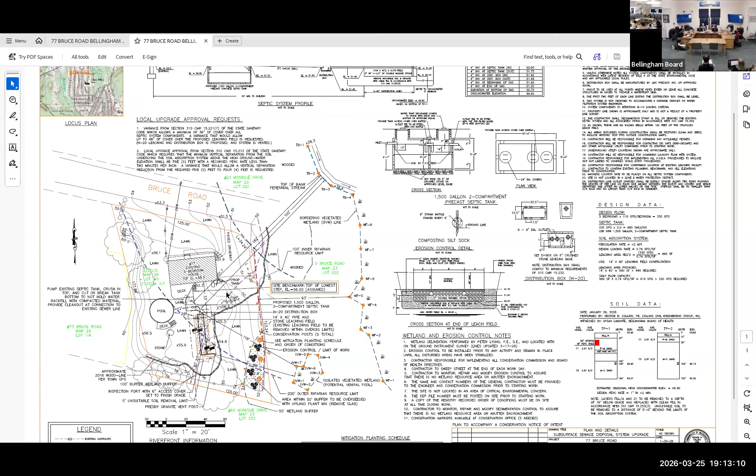The applicant has also requested a continuation to April 8th because everybody else is. So they're following suit, I guess. They all did this without knowing everybody else was doing it, I guess.

I wanted to free up some time since we have a lengthy agenda. All right, so I will accept the motion. Did they give a reason why that one was continued? They had to reflag and stuff, there was a flagging issue, some fault. Okay, I was looking to see if anything else came in.

I know Nicole wants to make this motion, but she hasn't yet had the opportunity. I did the first one already, it's been so long ago, we've done that so many times. Okay, so I'll make a motion. All right, the motion is made, second anybody? Oh, second, thank you, Hannah. All right, any other discussion?

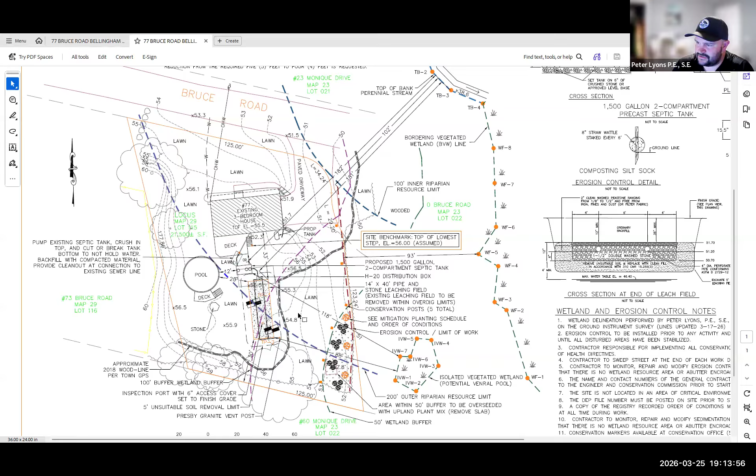All in favor? Aye. Okay, it's almost unanimous, brief departure from James just for the record, and we'll be continuing on, but that's it. Unanimous without hands. Also, just for the record, Steve's caller is not here this evening, so he is not going to be present for any of those votes.

We have a continued hearing for notice of intent for 77 Bruce Road, upgrade of a septic system, and after-the-fact removal of trees and yard expansion within the riverfront area and buffer zone. George Perkins at 77 Bruce Road is the applicant, and the representative is George Collins of Collins Civil Engineering Group.

Good evening, everybody. Can you hear me and see me? Yes, how are we doing? My name is Peter Lyons, I'm an engineer and soil evaluator with Collins Civil Engineering Group. Here tonight representing the homeowner, a notice of intent for a failed residential septic system, and after-the-fact notice of some tree removal within the 50-foot BVW limits and riverfront areas.

I presented this at the previous meeting to the commission, so I'll start with a recap and then jump into the changes made. Let me try to share the plan if someone can allow that. Looks like... okay, confirm we're looking at it. Yeah.

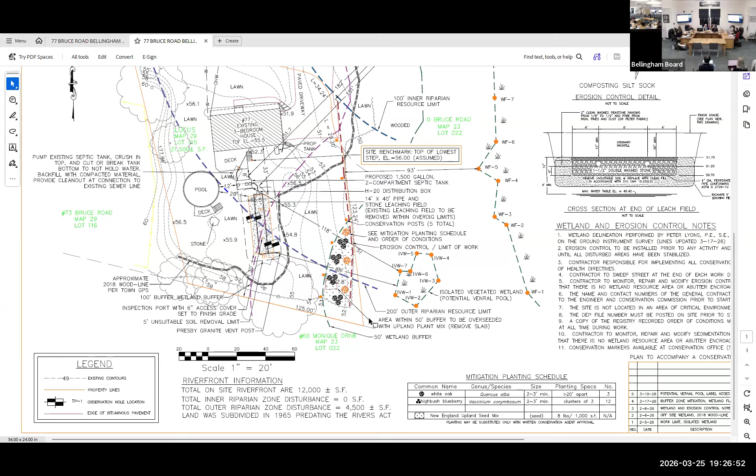So there's plenty of groundwater separation. And again, just to reiterate, we're fixing the failed septic. So anytime there's a failed septic system within the buffer zones, replacing it with something modern and up to par is a good thing.

Oh yeah, we are in consistent consensus with that—it's just more the level of restoration that the commission feels is desirable, warranted. And we have that isolated vegetated wetland, a potential vernal pool. That looks, just by scale, it looks like it's within almost 50 feet of where they want to restore.

So Pam, James, Moran, Nicole, what do you think? Do you want to expand and have them do more in the lawn, the 2018 lawn area to the east—west, I guess it is—of the area that they're proposing? And if so, about how much?

I mean, I kind of think we have to require that it meets the riverfront standards at a bare minimum. Yeah, it just seems like there's so very little vegetation for how much area. Hannah, what would the riverfront requirements be again?

You, I think, noted on the plan. Yeah, so it's typically up to 5,000 square feet. When you have a property that's a lot older and they've maintained clearing there prior, that's kind of essentially grandfathered in, but going over what's currently there.

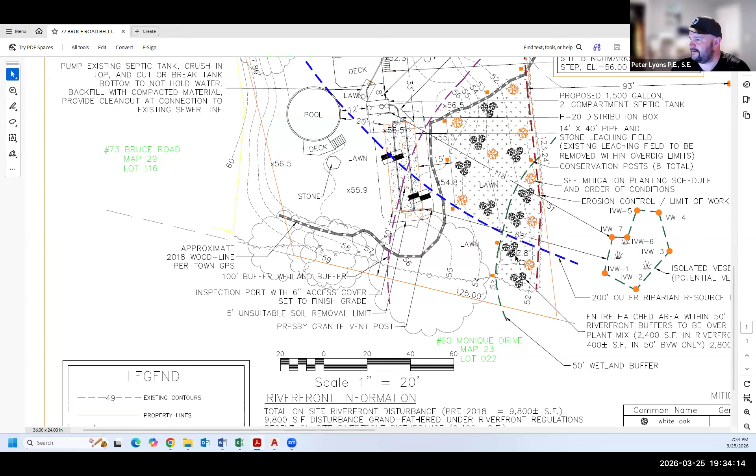Yes, the clethra, what else? Sweet pepper bush, yeah. And then there's Itea virginica, the sweet spire, I think it's called - I forget the common names. That's another good one for retention and understory. Maybe just look into a couple more options to diversify it a little bit.

The blueberries, I'm not feeling super confident about that many blueberries. How are you feeling about the number of oaks, the red circles, the proposed white oaks? Is that the right quantity?

I think now that you're pushing the quantities closer to each other, would there be an issue taking one or two of those out and doing more shrubs instead? Yeah, I mean, I think the number's fine because in the woods trees grow next to each other and they compete interspecifically, but I don't see that being a crazy number. Would there be another tree species you would suggest to replace in a plan like that size?

I was going to think black tupelo, but I don't think it's close enough to the water. That's something that if you guys want to issue an order tonight for the work, we can also just request as a condition that they come back with an updated plan. Yeah, that's a good idea. I just want to give him some ideas, so this gives us a chance, and he's not like, what the heck, where do I go from here?

I'm a big fan of white oaks, but diversifying it a little bit, maybe the tree species as well. Red oaks, you can throw some red oaks or black oaks in there too. Those are more prevalent than white oaks. I do like to see white oaks because there aren't too many of those there. So you'd like them to branch out into a little diversity. Yeah, that would make sense as a start.

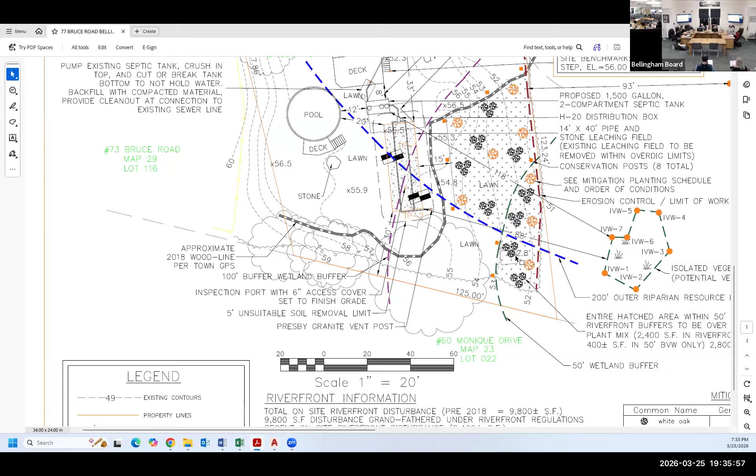Peter? Yeah, no, I understand everything the commission and members are concerned with, and we're fine with making those changes. I guess my last comment would be if there's any way to issue a conditional approval somehow, because this is a failed septic and time is of the essence. We've already continued once, and the homeowner is basically minimizing their water flow before it backs up into the house. So we definitely want to get this moving as soon as possible. We have no issues working in cooperation with the commission to get it done as you guys see fit.

I think you're done with it. No, I mean this is a great time, it's defrosted, so. It's defrosted out, for now. Okay.

With this plan, would your recommendation still be the order of conditions and then a separate enforcement order? I mean, that's what I always recommend, but if you guys want to put them together, we can. The enforcement order would cover the restoration.

So just issue the order essentially allowing the clearing up to those buffer markers that are on there, and then issue an enforcement order for the restoration, so they're not tied together. Then they can do all the work they want on that, and if you want to see a little bit more for the restoration plan, that would be part of the enforcement order, right?

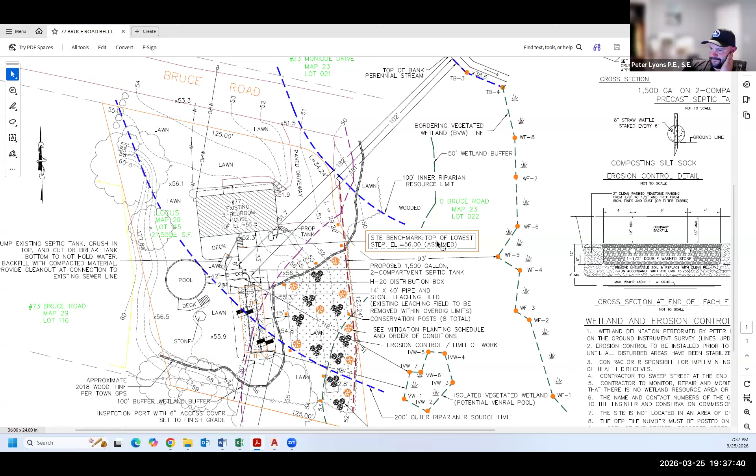Time-wise, instead of tying it to the order where they have three years, we can say okay, by next spring have stuff in, and just be able to monitor it a little bit easier. That's just what DEP recommends, so.

Yeah, I mean, I think we should definitely get them some approval to get the septic done. Yeah, that would stress me out too, if I was a homeowner.

If we are following the suggestion of doing order of conditions first and then enforcement order second, and if that's the feeling of the commission, someone wants to make a motion to issue an order of conditions. So moved. I'll make it. Let's make sure we phrase it properly, I was waiting for you. Hannah is on board with how we're phrasing it because she's the one taking the notes about it.

Be as explicit as you care to, Mr. Motion Maker, and watch Hannah's reaction to see if she's not following you. Want to make sure the order of conditions statement he's making in the motion is clear enough.

I mean, I think if you guys want to just talk about the general conditions and then make a motion after that, that might be easier. So I assume just allowing for the order would essentially allow for the after-the-fact clearing up to the limit of the buffer markers that are shown. Correct, and then those buffer markers also need to be a condition of the order of conditions, but they need to stay in there, not just be part of the enforcement order.

The top of the slope is about the top of the property line, going down into the wetlands area. It's a fairly steep drop off, so we need to make sure that any necessary erosion controls are put in place and inspected by the administrator as part of the start of the project, so we don't have runoff if they get a big spring rain, especially since they want to jump right into this.

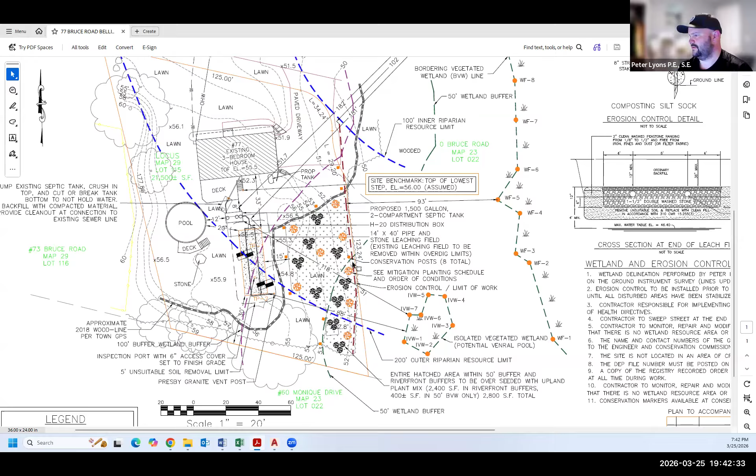Monitoring for the years, with the 75% planting plan, come back to us with an acceptable planting plan, because that was going to be part of the enforcement order, so we would review the number of trees and so forth. Something about that has to be done as part of the enforcement order prior to being released, and the monitoring is all that follows after that.

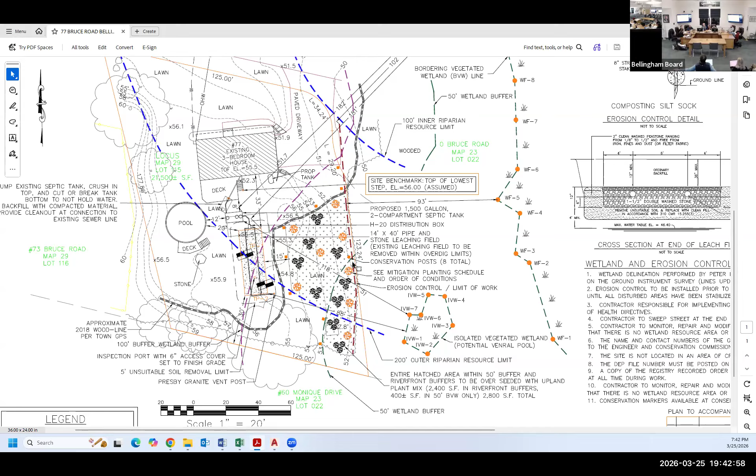Okay, is anybody else on the commission have anything they feel that Hannah might not already telepathically know from you and want to add verbally? Okay, so we have enough information for her to draft something up, but we still need to vote.

Yeah, we had a motion and a second, I'm just going to make sure nobody else wants to discuss points. All in favor? Aye. Opposed?

Okay, so we are signing off on an enforcement order, which Hannah will provide electronically, so we can just get that out.

I don't even remember, honestly. The new electronic signature thing we use—everybody's been able to do that okay online, right? Yep, nobody's had problems.

Good. So it looks like here we have an order of conditions in process, which will be drafted up as an enforcement order to make sure the restoration gets done and set up a timetable. It gives you a chance to respond, because the enforcement order would state that you need to come back with a slightly modified, now expanded plan, taking into account comments made by our arborist landscape designer, Nicole. That all good?

Yeah, that sounds like a plan. So basically, from my end, I'm going to make those revisions—we'll diversify the planting schedule, update the plan. That's basically going to be resubmitted as soon as tomorrow to the Conservation Commission, and that will act as the document pertaining to the enforcement order, but it will also be the same document applied to the septic contractor. It's probably going to be the same one doing the work, so we just want the approved septic plans to contain all of the required mitigation.

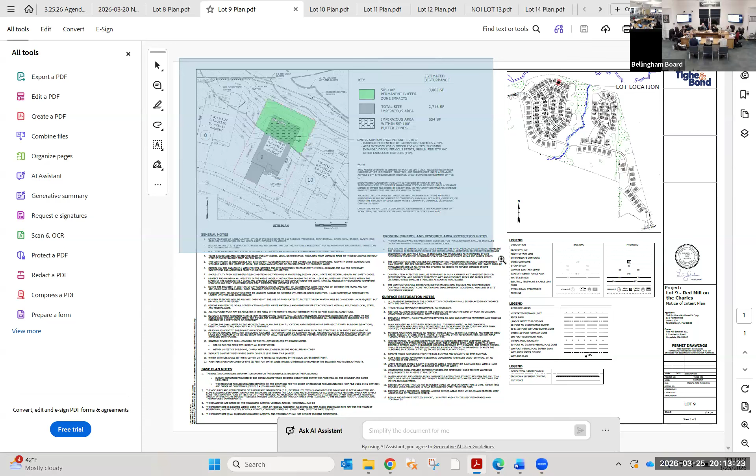You'll notice we have all the erosion control barriers shown on all the plans. Those are from the full plan set, and almost in all instances here, for the most part, they extend off the lot line. So you can envision between that lot line and that erosion control barrier, that's going to be restored, replanted, and left with natural lots.

Okay, and actually, I'm glad you brought that up. I've seen, since I've been on the board, that toward the areas, oftentimes, when erosion controls are not completely on the edge, they're left behind in the woods, and you find them later on. What do we have in place to ensure that doesn't happen with this project? Because it's so big, I can easily see different contractors working on different things, and then we find that these erosion controls were removed a year after.

Yeah, that's generally when they come in for the certificate of compliance. That's something we should check during the site walk for that, if you see any erosion controls still there, as long as everything's stabilized, make sure they come out. If they use the fully biodegradable ones, they can just leave them and they'll naturalize themselves.

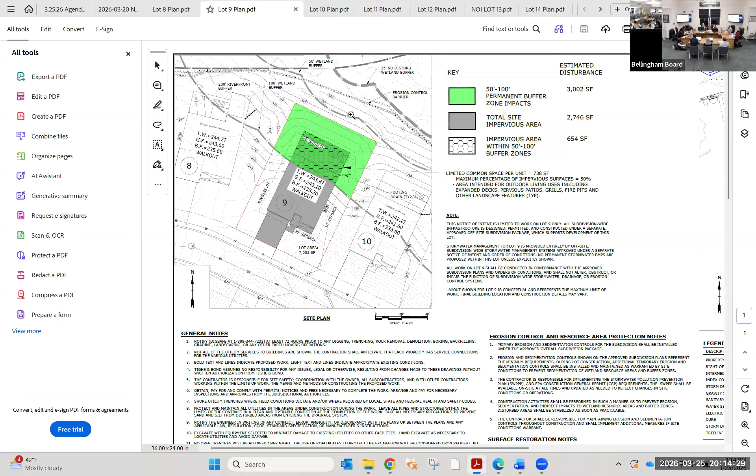Yeah, to a certain extent, and it takes forever. The coir ones take like 3 or 4 years and then they're basically mulch. Okay, not the netted ones though, the netted ones will never go away.

And then in general, it all depends on what alternatives exist for a site. If we want to do open space versus restoration, or a combination of both - if there's no feasible way for them to restore it, but it's also the only feasible option for a property, there's a cost benefit that comes into play where we can't just make you leave your property undeveloped if this is what you want to do. So we have to come to an agreement, and sometimes that's open space versus restoration, or vice versa.

Good, thanks. All right, thank you.

All right, anything else on number 8 before we jump to number 9? Okay, all right, so lot 9 is clockwise, moving to the east to the right.

This is the plan for lot 9. We'll zoom in here a little bit. So similar, a little bit of encroachment for the dwelling itself - this line right here, within the outer 100-foot buffer zone, and then the extension of that outdoor living area within that box footprint. You can see the 50-foot buffer zone off the lot right here.

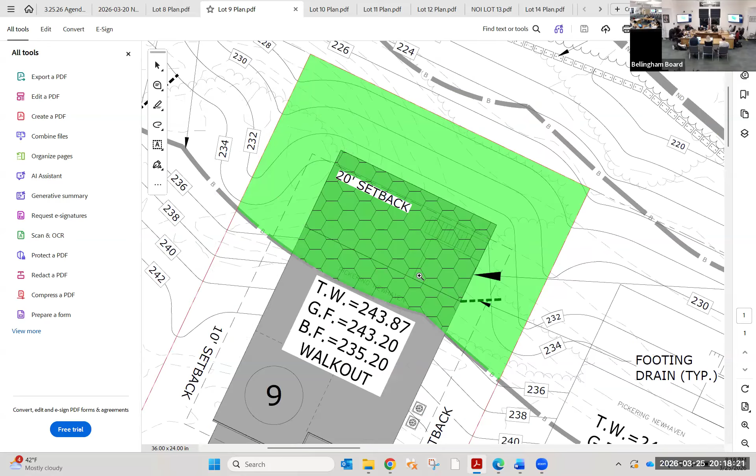So there are supposed to be concrete bounds at the edge of the open space on all of the lots, per the order of conditions, for the overall larger plan. They're supposed to be concrete bounds with one at each apex and then one at the midpoint. I think the concrete bounds don't have to be more than a foot off the ground, do they? No, I think they're taller. Are they? Yeah, do you know? I'd have to look back at the detail. Generally, I've seen 6 to 12 inches. So not something we'd be putting a marker on? I think they're supposed to have a marker - I can look at the order, but there are supposed to be bounds at the edge of all the lots before you get to the conservation open space.

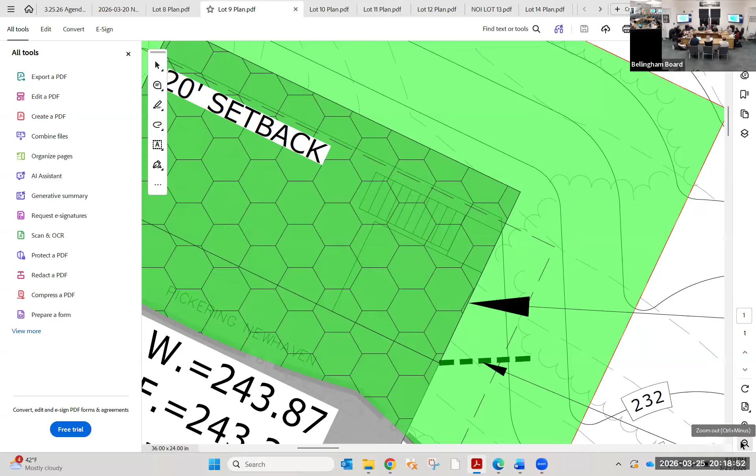Maybe as Don was alluding to, getting towards a 12 inch or whatever the bound maximum height could be, they're not gonna voluntarily do it without being told they need to. Those are perfect spots to put them if they're on the end of the property already, not to add posts, like on the project where they put tape on there but they're only a foot tall. It's like a survey bound, you can't really put a post on it necessarily, but if they're not tall enough to be usable for putting up signage saying do not go beyond this point, we'd have to specify an additional post. If they could make those taller, we could just mount signage on there and not have to add more posts. That's something to look into down the road, make a note of it.

My concern on the topic of nothing being in the backyard is we see it all the time - someone's gonna say I could have a bigger yard, or someone's gonna be throwing their clippings back there, or a tire, or who knows what. We had this discussion earlier today. I think that's something we collectively should think about on lots that have resource area behind them, or open space, which I think most of the open space has resources in it.

We'll take a closer look, as Hannah said, at what was included in the original order, and then circle back on that point. I'm guessing we probably said we'll include that in the individual lots - they were bound to look at it sometime.

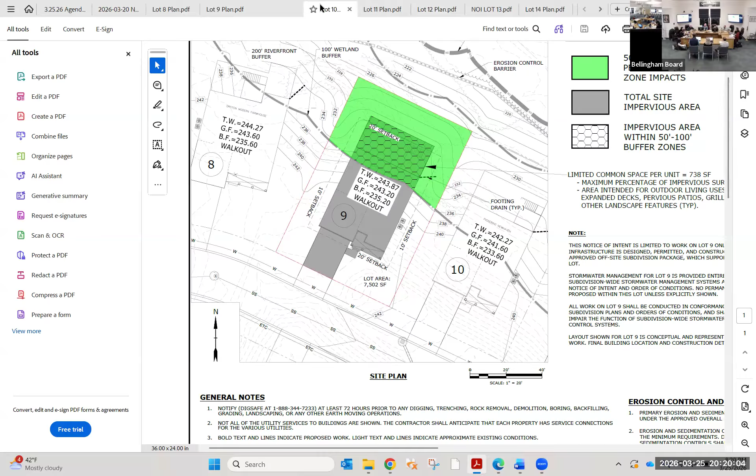Thank you. Any other questions on number 9? No, I was just gonna move along. I have a question, this might apply to other sites too, but since I'm seeing it here - you have marked out the setbacks.

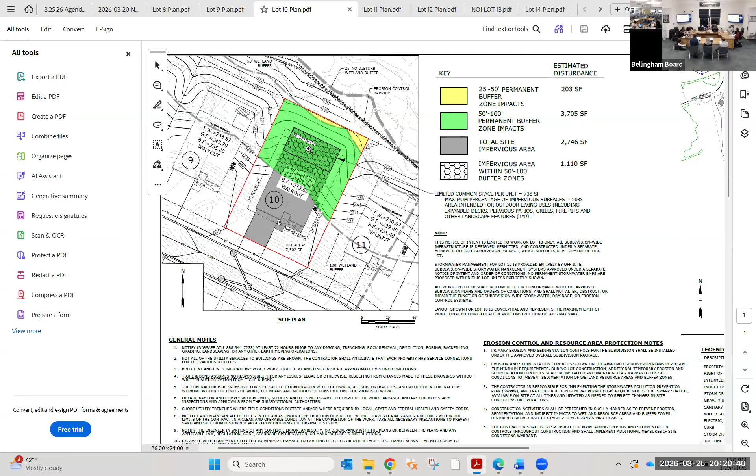Part of the impervious area within the resource area is further beyond the setback. Is that outdoor living space out there, or the dwelling? That would be outdoor living. It's hard to see, let me zoom in a little. So you can see this footprint right here - this is the edge of the dwelling itself, and underneath, up the stairs, here's a little potential outdoor deck and a set of stairs, all within the zoning setback. That could potentially be like a patio or some sort of landscaping beyond into the setback.

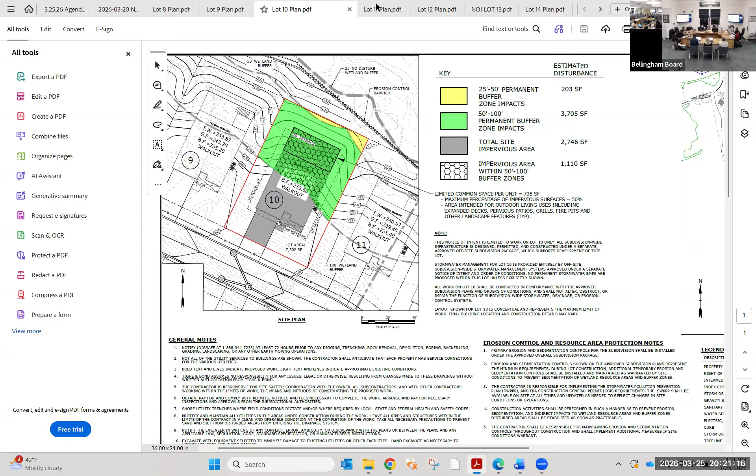I just wanted to make sure, because with the hexagon thing it was hard to see. Yeah, we grouped it together to show the max potential and account for it.

Just to clarify the last question, the bounds are specified to be 4 feet high and to have signage that has 'no disturbance zone' on it as well. All four in the first one. Great, thank you. Number 52.

Because we've used cedar posts - there you go, Hannah, good memory. We'll get into this later. It's fine, whether concrete or cedar, whatever they are, something that will last a long time. They're installed to be easily visible with a height of 4 feet. That's specified for anything that has a resource area behind the property, but not necessarily going to be every lot on the site - lots abutting open space.

Which I believe is gonna be everything. I was gonna say, it's gonna be riverfront, it's gonna be buffer zone area, that's also gonna be open space. Every lot you see - keep it separate. Okay, alright, it's number 10.

Continuing on clockwise to the east southeast, lot 10, similar thing - buffer zone. On this lot there is a little bit nibbling into between the 25 to 50 foot within the outer 50-foot buffer zone, that's 203 square feet. But same thing with the structure, this is very similar, I think the same model as lot 9 - same kind of lot configuration, lot size, and outdoor living to the north. I'll just pause there.

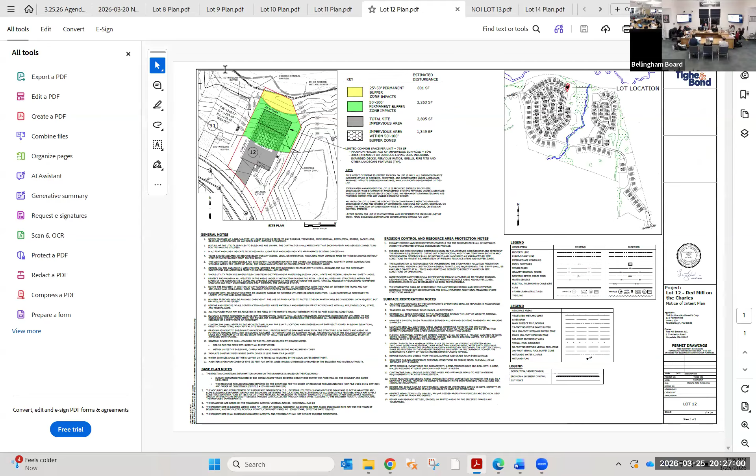And if they had not addressed that in the overall and found replication areas or restoration areas to make up for this, then they wouldn't have been approved at this point in time. We would be saying, nope, you can't do this here because we're just looking at this one lot and you've exceeded the maximum, for any standard, probably 60% of the lot, if that's what it is, if you're into the buffer zone impacts, without an overall.

So yeah, because those have all been covered, and more than covered. Was it like 2-1, 1-1? I don't remember the original. Yeah, I mean, the restoration we're doing versus more than what was approved.

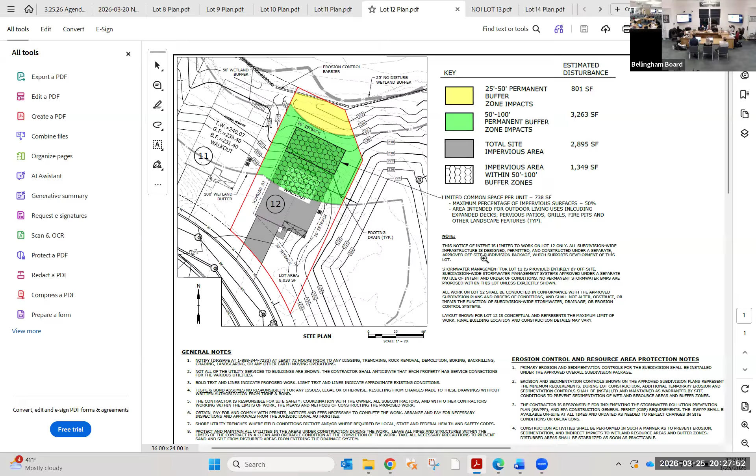We expanded riverfront area, restoration areas, minimized riverfront area impacts. And as we talked about at the last meeting, we did see some other opportunities to do some additional revegetation within the buffer zone.

And so we respected the limit of work lines that were presented in the initial order and then the amended order that we're requesting. And as you can see, grading out these lots is pretty difficult with the tight site that we have. And so a lot of these end up being walkouts, as you noted.

What ends up happening with those walkouts on the backside is no matter what, you need a door out the back of the home on the living level, which needs to have a landing. And then you need stairs from that landing down to grade as a minimum. So this outdoor living space that we define in the back, the vast majority of it is going to need.

To cover that landing area that's obligated by code and the staircase down to grade. So it's not, we're not just pushing this to push it, we're looking at what is reasonable here, considering these are walkouts, we need to have those landings, we need to have stairs down to grade.

No, offering the L&T option, ladder and trampolines.

Down and out. Getting back up is a little harder because if you jump too far. Takes practice. Okay, thank you. No problem.

Moving on to lot 12, this is the last lot in this batch before we jump to the other side of the stormwater basin. I'll circle back after I go over this one.

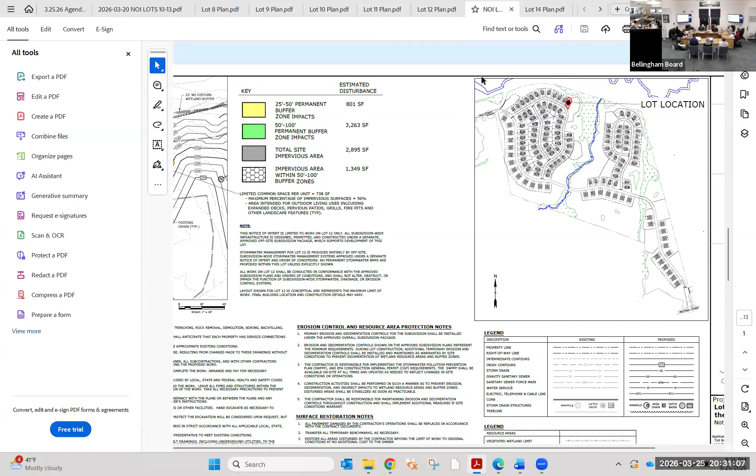Just to go over very briefly, going back to lot 10, you can see this dark bold line is a retaining wall that extends across to lot 11. It's off property on lot 10, but it does then go onto lot 11. Anything on the other side of that retaining wall isn't necessarily going to be lawn permanently - that will define the limits of the development footprint. You can see that continuation onto lot 12 there, then terminating, just chasing the grades.

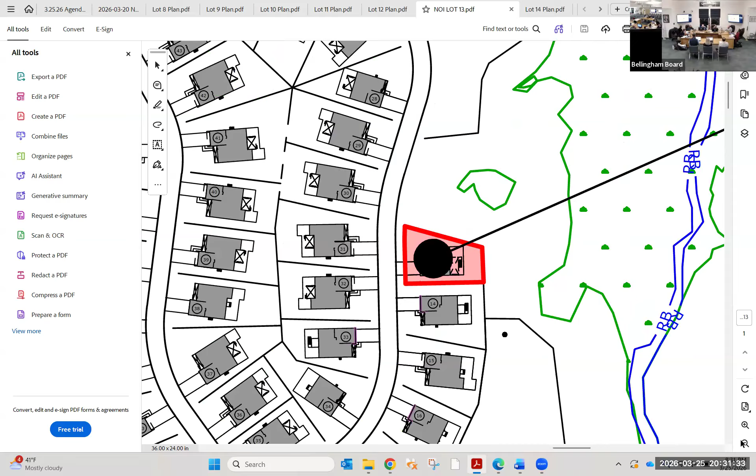Which you guys don't have these yet - I didn't have a chance to upload those into the portal, but they'll be in there for next time. Is that an update because of the plan that was amended for our last hearing? Yes, the retaining walls. It's not actually new, it was on the full plan set - we just noted it didn't get shown on these individual NOIs.

Let me ask another, maybe moronic question, but with these lots, have we considered, because of their location to wetlands, can you restrict fertilizer use, insecticide use, that kind of thing, as a condition on these specific lots? They're so close to wetlands, that's just my main concern, minimizing contamination into the wetlands. There's no real room for plantings or anything instead of lawn, so.

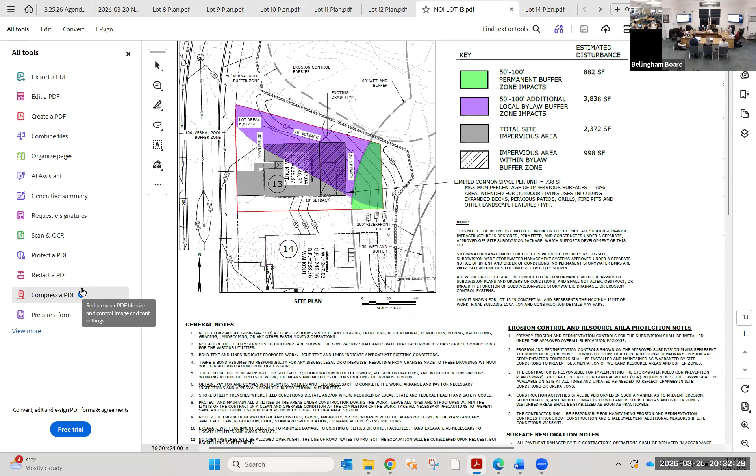Right, that was what I was thinking. Condition that, just like we conditioned no salt areas, same sort of deal. Doesn't mean it'll necessarily be followed by a homeowner 10 years from now, but we can still make it a legally binding condition.

Normally I'm not that concerned, it's just that these are so close and in many cases inside. And to your point, these are going to be individual lot notice of intent, individual lot order of conditions, you can definitely condition these. Okay, so I guess it wasn't as moronic as I thought it was gonna be.

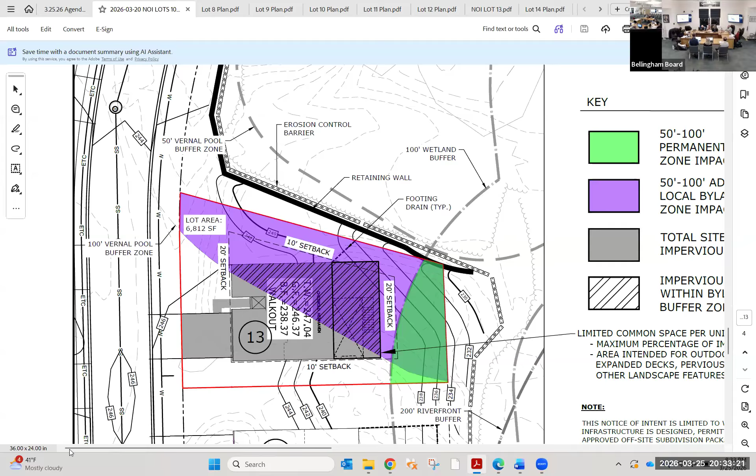Sounds dumb. The night's still young, Don. I'll get there, trust me. Yeah, and by the time COCs are filed for these individual lots, there can be ongoing conditions on a lot by lot basis. Thank you.

All right, I'll jump over to lot 13. So this is on the other side of the stormwater basin, continuing clockwise along that outer road system. The vernal pool is right here, an isolated vegetated wetland vernal pool. The BVW is over here. I'll just zoom into the lot.

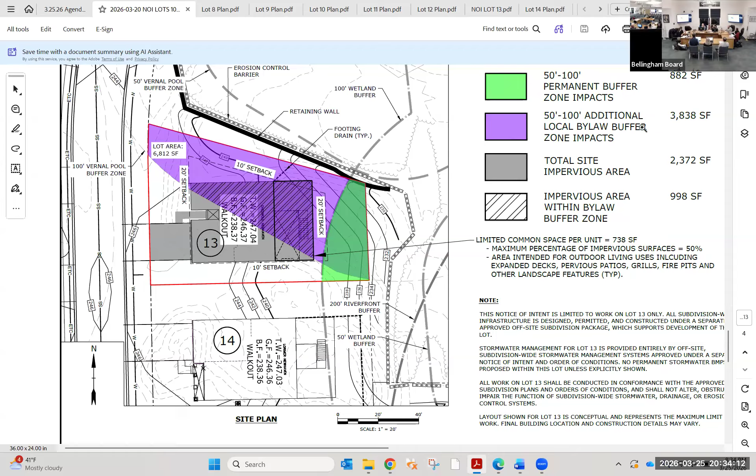So purple is the buffer zone to the vernal pool to the north, that's off page. You can see there's no work within the 50-foot buffer zone to that vernal pool - that was purposeful as part of the larger subdivision review. There is some overlap into BVW, within green, within the 100-foot buffer zone - again, that's to the BVW, to the unnamed perennial stream. No riverfront area again on any of these lots, and an open, cleared, disturbed setting right now.

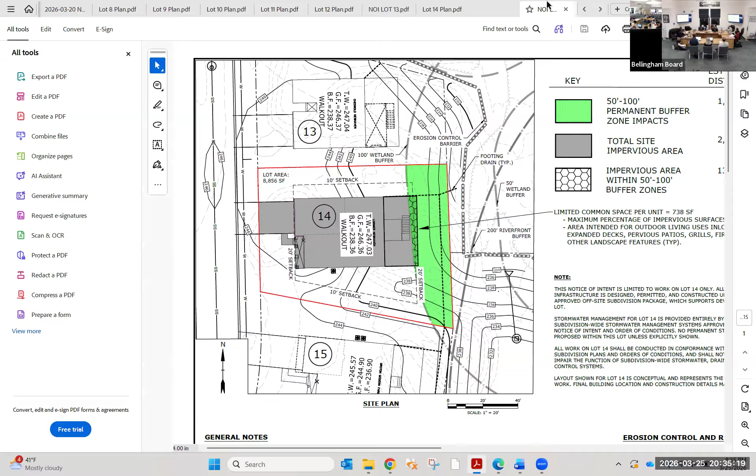On this lot, this was also an additional update where we did show there is actually a retaining wall - I think that one was from the initial design, not changed from the initial, amended one - that's been retained along the limit of work up gradient of that vernal pool to the west and to the south. You can only see a very small portion extends onto the lot, it's primarily off lot.

There's steep sites. Are they gonna have sewer? Yes, there's a few sewer pump stations.

So again, this is the only lot that's within the 100-foot buffer zone to a vernal pool in this first group, and it's open and cleared right now.

All right, I can move on. Sure, any questions? No? Okay.

So lot 14, moving down to the south, this one only has the 100-foot buffer zone to the BVW. You can see we're starting to now get just off page the 200-foot riverfront area buffer, just off lot to the east. Only a small portion of the future potential outdoor living uses gets into the 100-foot buffer zone. You can see here more clearly where the deck and a landing is upstairs, outside of the 100-foot buffer zone, so only basically lawn within that outer 100-foot, greater than 50 feet.

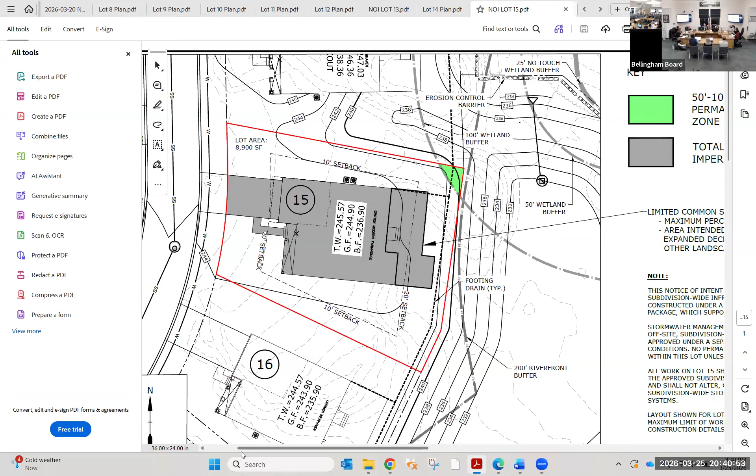I'm not sure if you can close and issue an order by DEP number - we can. I was going to suggest, prior to the amended order of conditions, the larger amended order of conditions, maybe it's conditioned upon that approval, then these are valid orders, something like that. I'm not sure if that's allowable or not. But the idea here was we can start opening these, we can at least talk about them, and then when the time comes that everyone is comfortable to close, we can close, whether that's before that amended order is closed or not.

Yeah, I guess my concern is there's already 8 now. So if we don't have that amended order finalized for the next month or two, and then we get another batch of 8 or 10, we're gonna have 20 of just this project on an agenda. Plus we have a busy agenda regardless of this. That's why I'm more asking - logistically, what's your plan on submitting, say, the next batch that might include those riverfront area? I'm assuming you have at least the applications ready, you weren't just waiting to submit them.

We just submitted 4. Oh, okay. Only 4? Yeah. There's 36 total - 34. 34? Yeah. Oh, that's good.

We're cognizant of the commission's time and the agenda, so hopefully this answers a lot of questions up front. Given a lighter agenda, it was good to go through these in more detail. Hopefully the more we get into this, it becomes more formulaic and we understand how the plans are presenting and what the impacts are. I think the major domino will be the amendment request, and that brings it full circle, so hopefully this is much simpler moving forward.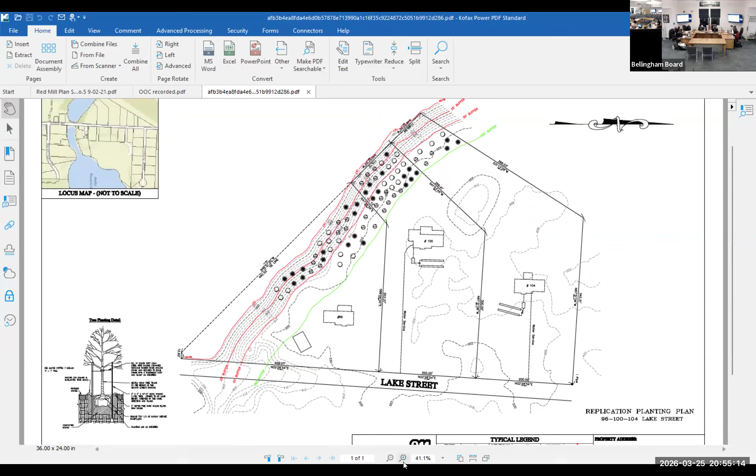I don't think I can vote on that, I wasn't alive. Yeah, we were, I was alive but... that's okay, it doesn't matter. You might have been alive, depends on when. Maybe for this hearing, but you can vote even saying you weren't born. The world's a crazy place. I've been on this job longer than about half the staff.

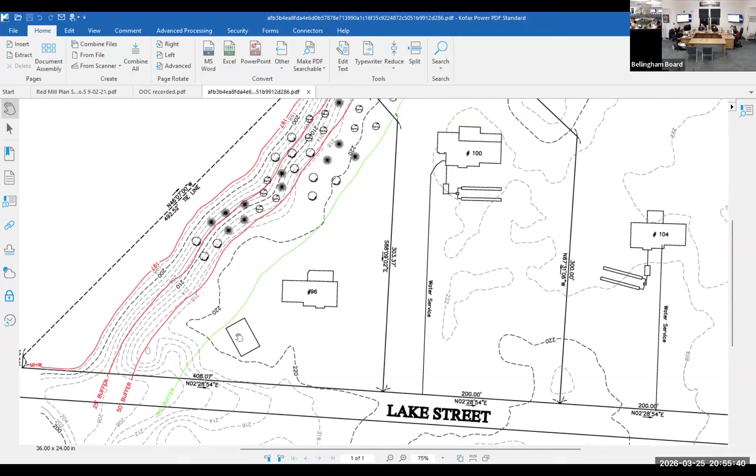Aw, yeah, when we got on the board, when we were naming it, when we were going through it, I told him, I said if there's only one position, you take it, because he's knowledgeable and I trust his judgment. We had two spots open.

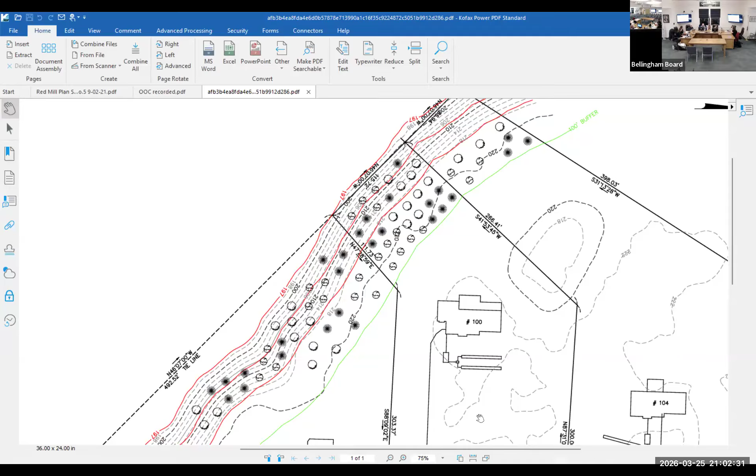She wasn't able to do any weekends until like April 24th or something. She's got like 3 kids, so I don't know if they have travel stuff. I was thinking that might be another situation where we have to do an evening visit. She has like 3, exactly 3 kids, she's managed. I saw kids running and then she said, oh, I'm getting all of them into the car.

I think more than 3. I think more than 2. Hard to tell with all the chickens.

So you're gonna check and see, maybe not next week, but the week after? Oh no, she can't do it. I don't know if we'd want to try to do 2 meetings on Tuesday also, but I can see if she could do next Tuesday later in the day, if that's possible. I'd say reach out and say, in the next 2 weeks, when are you available, and then just pick one of those.

I'd rather at least one of us get eyes on it than let it go for weeks. Exactly, I was like, that's not gonna work going all the way into April. Yeah.

Okay, I really tried to get them on the same day, it didn't work out that way. So what day was that one? I'm going to ask her - Bill, you'll ask for her the next two weeks.

All right, sounds good. Anything else? Yeah, just a note that I checked and the May 27th meeting is town meeting, so that's the one that's going to be canceled. We want to put that out there.